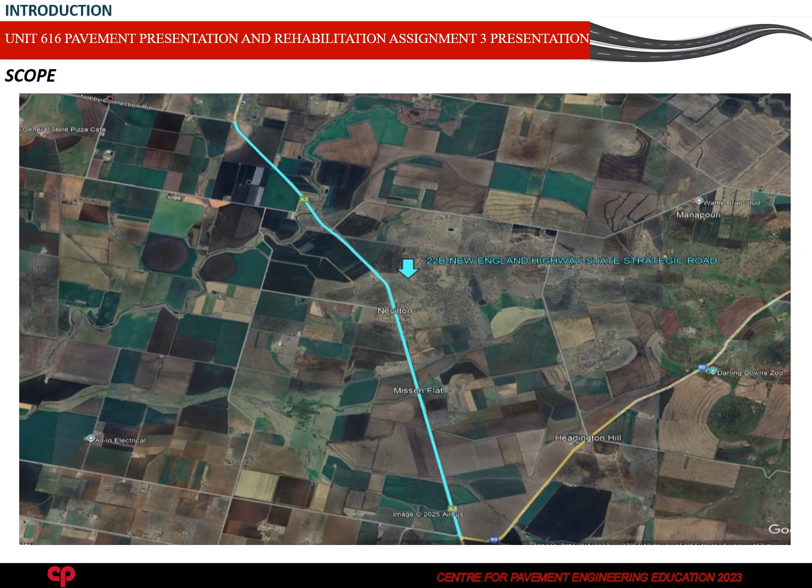The first step in the assessment was a visual inspection of the corridor. This allowed us to identify surface defects such as flushing, rutting, patching, and bleeding. These observations gave an early indication of where the pavement was under stress and helped to validate later data analysis.

In addition to visual inspection, two key datasets were available. The first was the serviceability dataset collected by TMR in 2022, which included International Roughness Index, skid resistance measured by SCRIM, and surface texture expressed as mean profile depth. The second dataset came from deflectograph testing in 2025, which provided deflection bowl measurements to assess structural capacity. Together, these three sources, visual inspection, serviceability data, and deflection data, provide a comprehensive picture of the pavement's performance.

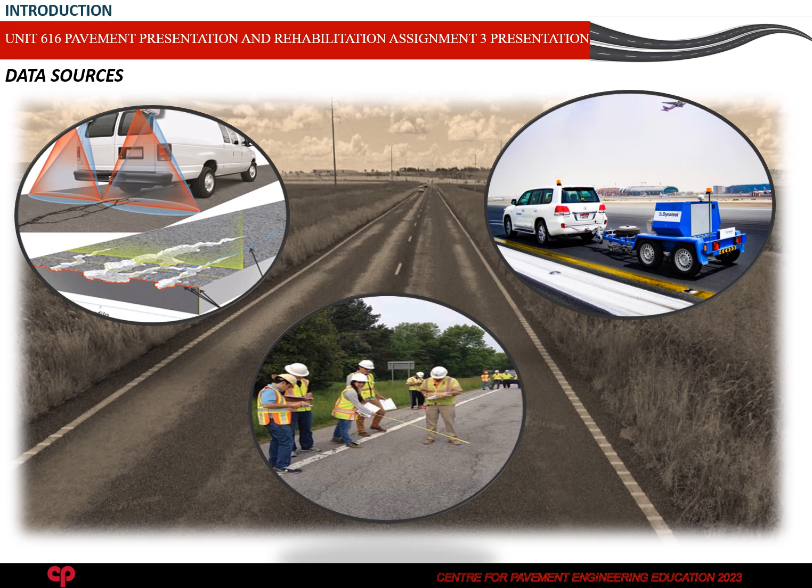The International Roughness Index was plotted against chainage along the corridor. A threshold of 4.2 was applied, which represents an acceptable ride quality. Several sections exceeded this threshold, particularly around areas of patching and rutting. Poor ride quality affects driver comfort, increases vehicle operating costs, and accelerates deterioration in other pavement layers. The results clearly demonstrate that sections of the corridor have already reached an unsatisfactory level of performance from a user perspective and require intervention.

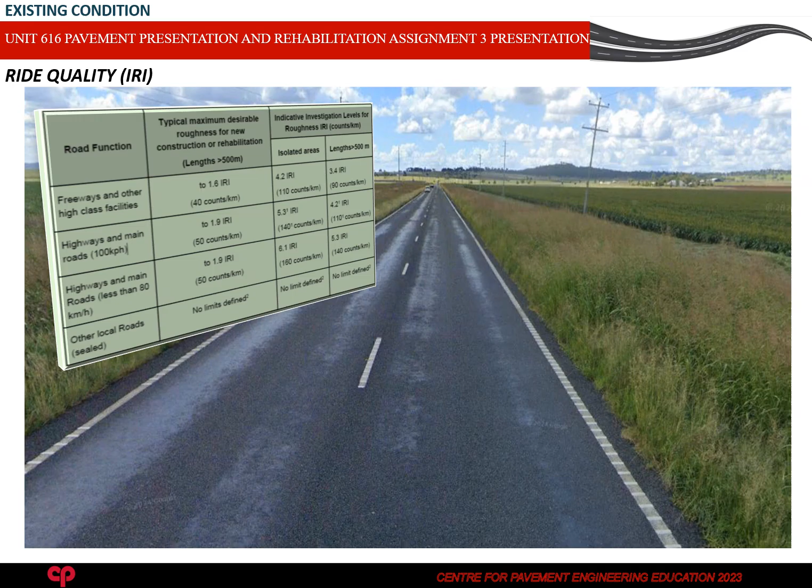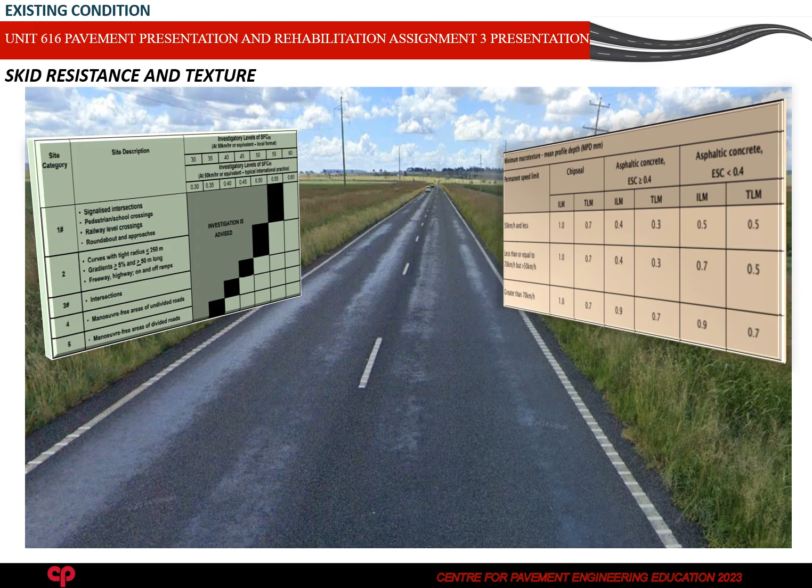Visual inspection confirmed the data results. Common defects observed included flushing and bleeding in sprayed seal areas, rutting in wheel paths, patching where local failures had been repaired, and general surface ravelling. These defects are typical of pavements approaching the end of their serviceable life. They reduce safety, lower ride quality, and allow water ingress that accelerates structural damage. These photos illustrate the visible impacts of the performance indicators already discussed.

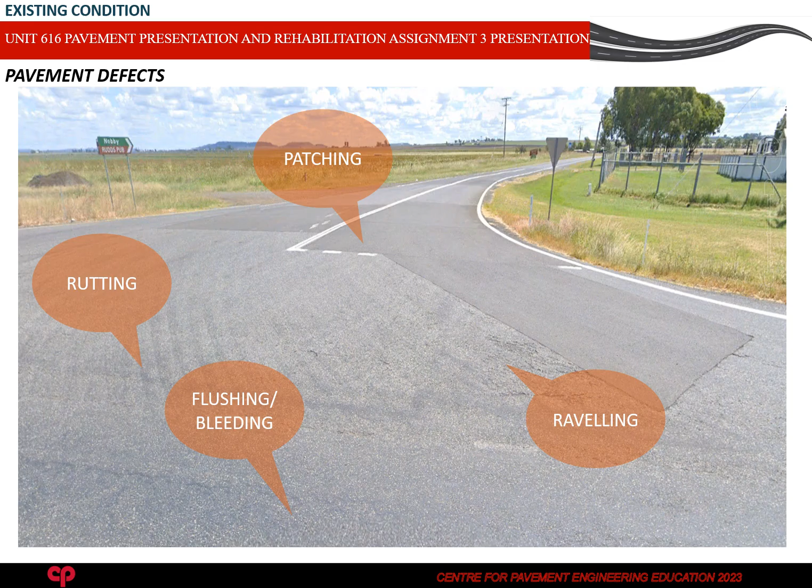In addition to the serviceability survey, structural testing was undertaken using the deflectograph. This provided deflection bowl parameters across the corridor, and in some areas results exceeded tolerable limits. These values highlight where the pavement structure is insufficient. At this stage, our assessment is largely based on this deflectograph data. However, the scope of investigations was limited and more detailed testing will be required before a final design can be adopted. For now, these findings point to the need for structural strengthening.

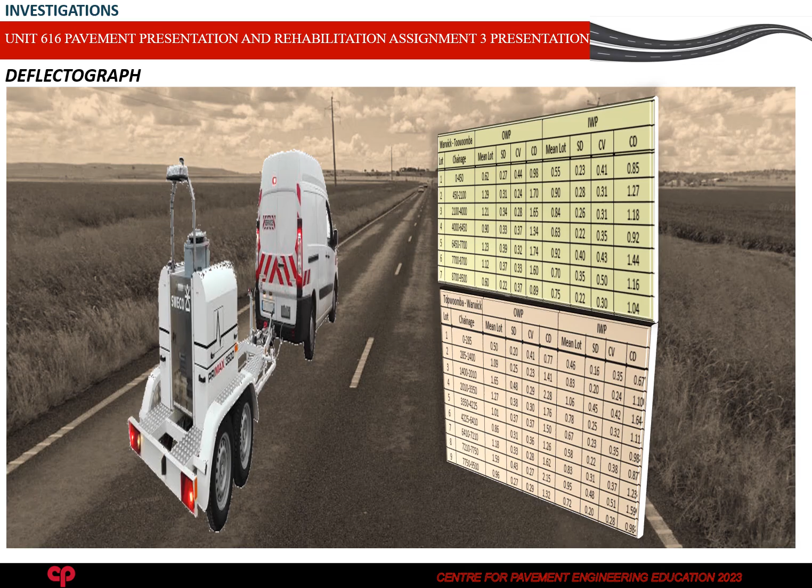The corridor is founded on vertosol soils, which are expansive and moisture sensitive. These soils exhibit low CBR values, often below the 15% required by MRTS-05 for subbase layers. The corridor also passes through areas that function as floodways, meaning drainage is a critical weakness.

Inadequate drainage allows moisture to infiltrate the subgrade, further weakening the pavement and causing differential movements. These geotechnical and hydrological issues must be considered alongside structural design to avoid premature failures.

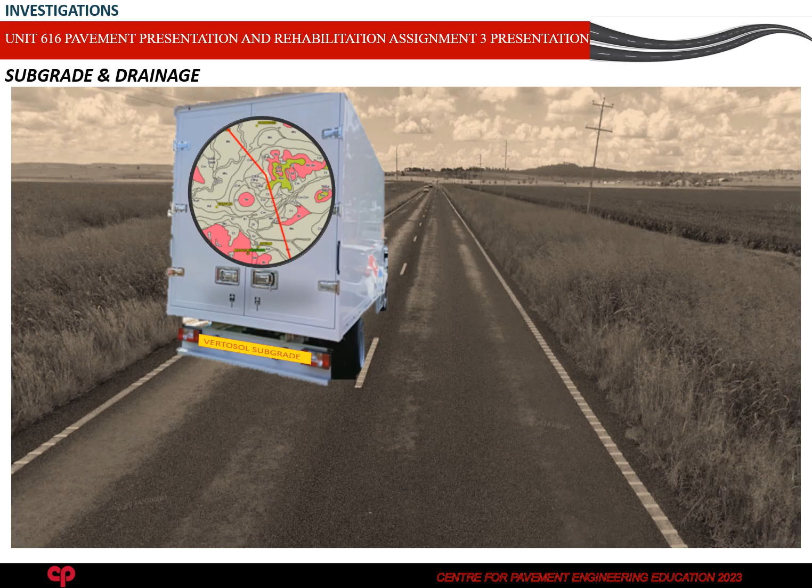The lower subbase material does not comply with MRTS-05 requirements for strength, further compounding the problem. These findings indicate that structural strengthening is necessary in addition to surface treatments.

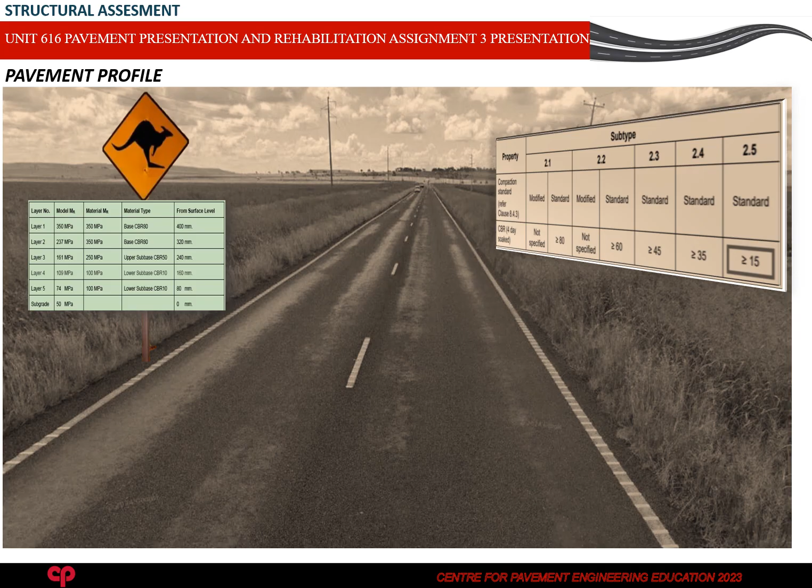Granular overlays were evaluated as one of the key rehabilitation options for this corridor, which required thicknesses ranging from about 110 to 200 millimeters, depending on the chainage and existing pavement condition. The primary advantage of granular overlays is their relatively low upfront cost and the availability of local materials, which makes them attractive for budget-constrained projects and sections with lighter traffic.

However, granular overlays are highly dependent on drainage performance and moisture conditions. Without effective drainage, the risk of premature failure increases significantly. They also require thicker layers to achieve structural strength compared with asphalt, which can create constructability challenges during placement and compaction, particularly under live traffic conditions.

But these charts are limited for granular overlay to 200 millimeter thickness. Some sections should be suggested for reconstruction because they require above 200 millimeters of granular overlay.

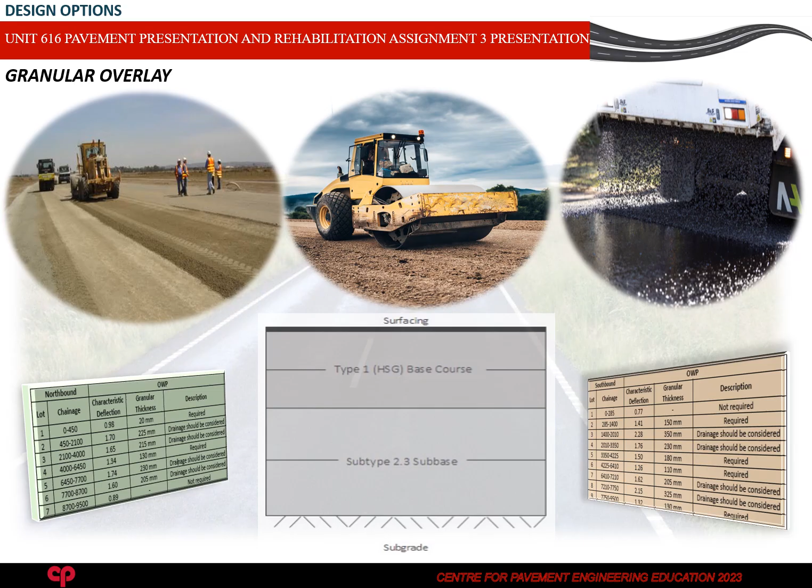Asphalt overlays, typically designed at a thickness of 130 to 150 millimeters using dense graded asphalt, class 320, represent a strong long-term solution for this corridor. For the same reason as the granular overlay, sections requiring above 150 millimeters of asphalt should be considered for full reconstruction as a solution.

They provide both structural and functional benefits. Structurally, they strengthen the pavement to carry heavier traffic, and functionally, they immediately improve ride quality and skid resistance. One key advantage is that asphalt requires less thickness compared with granular overlays, which makes it easier to construct under live traffic conditions and reduces user disruption.

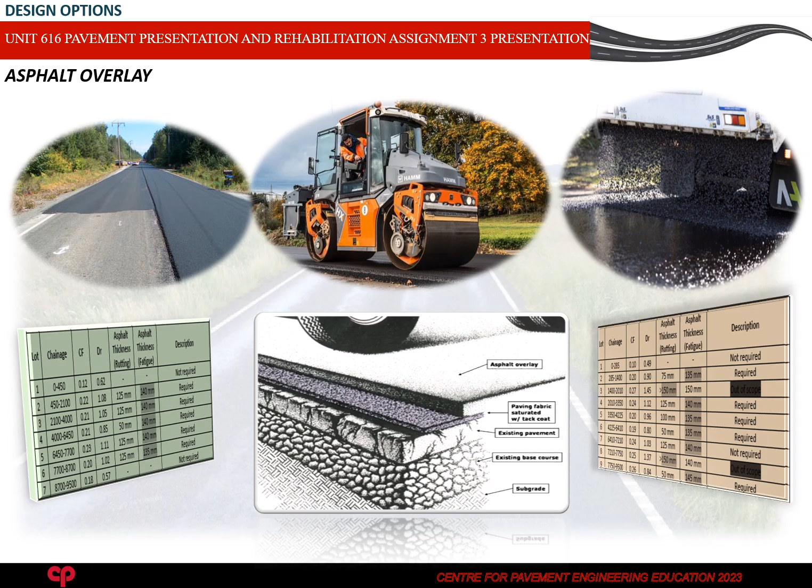In our analysis, overlay thicknesses were determined using empirical design charts, which provide a useful initial guide. However, these solutions are preliminary, and before adopting final overlay designs, additional field and laboratory testing must be undertaken. With DCP testing, test pits, and laboratory characterization, a mechanistic design approach will be possible, giving us more confidence in fatigue and rutting performance predictions and ensuring the overlay design is fully optimized.

When we place granular and asphalt overlays side by side, the differences become quite clear. Granular overlays provide a lower cost entry point with material typically available locally and relatively straightforward construction. They are an attractive option for lighter traffic sections or where budgets are very tight. However, they rely heavily on good drainage and moisture control.

Without this, they are prone to early deterioration, and the thicker layers required to achieve strength can be difficult to construct under live traffic conditions. Over time, their higher maintenance needs raise the overall cost.

Asphalt overlays, on the other hand, come with a higher initial cost, but they deliver significant benefits. Because of their higher stiffness and durability, they provide longer service life, fewer maintenance interventions, and immediate improvements in ride quality and skid resistance. They also achieve structural strength with less thickness, which makes them easier to build under traffic.

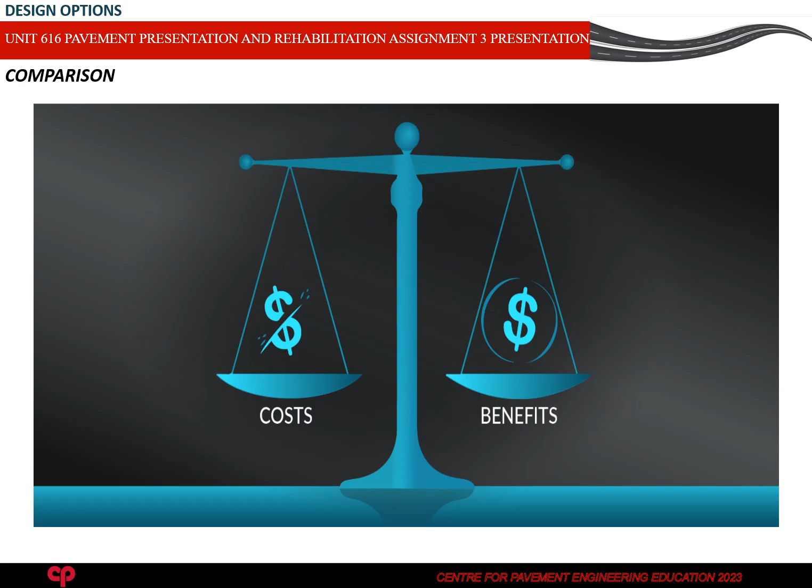In assignment 2, we saw that in several sections, granular solutions alone wouldn't meet the structural demands without drainage upgrades, and asphalt overlays were recommended as the more sustainable choice. Ultimately, the comparison shows that while both treatments have a role, asphalt is the stronger long-term option for critical sections, while granular overlays can still be justified in less demanding parts of the corridor. The key message is that treatment selection should be section-specific, balancing cost, performance, and site conditions.

It's important to emphasize that the design options I have presented are preliminary and cannot be considered final. To confirm the appropriate solutions, further investigations are mandatory. Dynamic penetrometer testing should be undertaken across representative sections to measure in-situ subgrade strength in more detail.

In addition, test pits should be excavated to visually inspect layer thickness, collect samples, and identify any variability in the pavement structure. Laboratory testing of these samples is required to determine material properties, check compliance with MRTS 05 specifications, and assess moisture sensitivity. These combined investigations will provide the robust data needed to finalize overlay thicknesses and validate mechanistic design inputs. In addition, falling weight deflectometer tests are required to carry out back analysis for existing materials if a stabilization process is required.

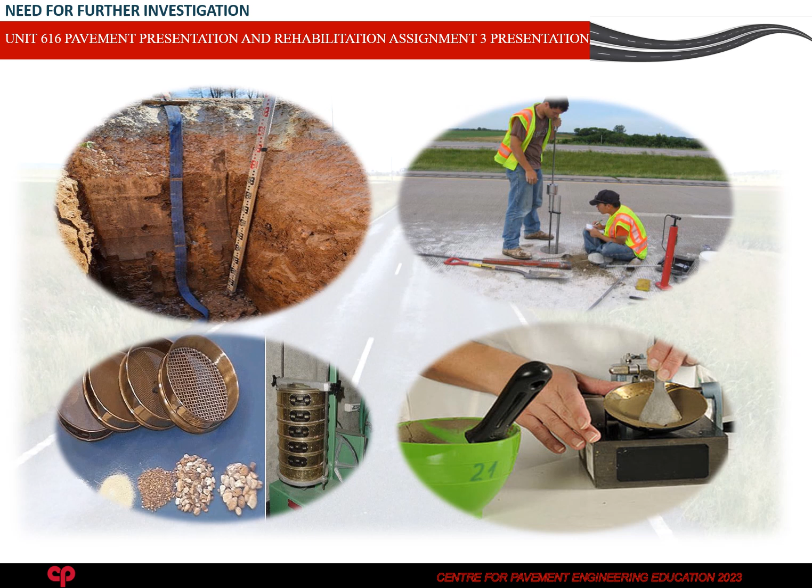In this section, we looked at the options not only in terms of initial construction cost, but also from a whole-of-life perspective. That means we considered the upfront costs together with the long-term maintenance, periodic rehabilitation, and how much value each option would provide over the design period. For example, in assignment 2, we saw that while the granular overlay option may appear cheaper at the start, it's likely to require earlier interventions and more frequent maintenance under heavy traffic conditions.

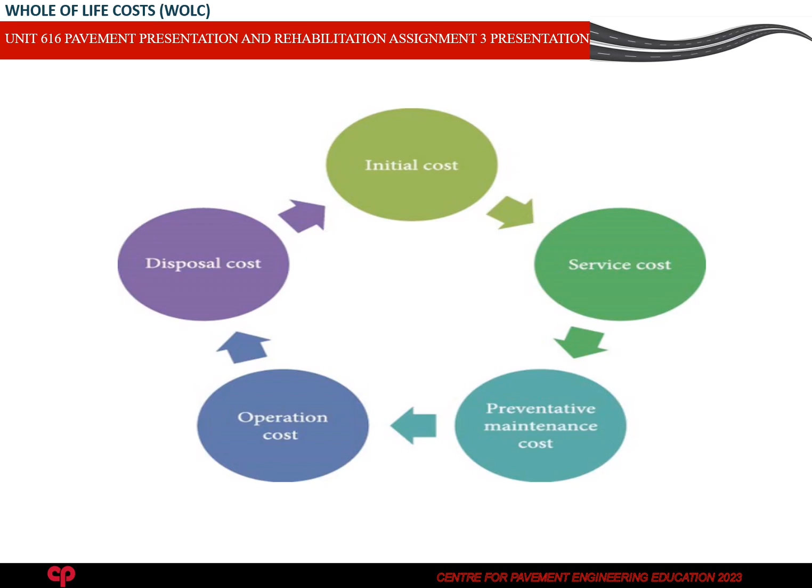The asphalt overlay option, on the other hand, has a higher initial cost, but offers better long-term performance and fewer interventions. When we assess them through a whole-of-life cost lens, the asphalt solution demonstrates better economic efficiency over time. This method helps ensure that our recommendations are not only cost-effective at construction, but also sustainable, reliable, and financially responsible across the pavement's full design life.

One of the primary challenges we face on this project is the lack of adequate drainage solutions. Without proper subsurface and surface drainage, there is a high risk of moisture ingress, which accelerates pavement deterioration and reduces structural capacity. Another critical issue is the presence of expansive soils, which are highly reactive to moisture changes and can cause heaving, cracking, and loss of serviceability. Addressing this requires careful selection of overlay thickness, material stabilization, or even subgrade treatment.

Finally, we need to consider construction-related risks, such as traffic management during works, weather sensitivity, and material availability. These factors not only affect the practicality of implementing the selected alternative, but also the long-term performance of the pavement. Together, these challenges highlight the need for robust design decisions that integrate geotechnical, drainage, and constructability considerations.

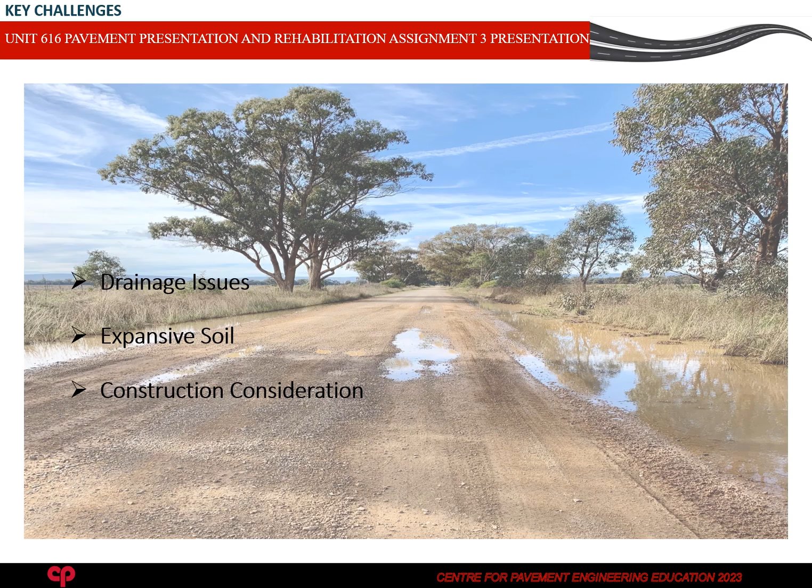In the immediate term, thin asphalt resurfacing is recommended for sections with critical safety risk due to low skid resistance or poor texture. These quick interventions will restore safety and serviceability for road users. Immediate works should also include sealing cracks and preventing further water ingress. These short-term measures are essential to maintain functionality while more substantial works are planned.

In the medium term, targeted overlays are required to restore structural capacity. Granular overlays should be applied in lighter trafficked areas where budgets are constrained, while asphalt overlays should be prioritized for high traffic or structurally weak sections. This targeted approach ensures that resources are used efficiently, addressing the most critical needs while keeping overall project costs manageable.

In the long term, more fundamental improvements are necessary. These include upgrading drainage systems to reduce floodway risk, stabilizing subgrade soils to address expansive behavior, and maintaining a consistent monitoring program using IRI, SCRIM, and deflection testing. These measures will build resilience into the corridor, ensuring it can provide reliable service well beyond the next 20 years. The long-term strategy aligns with sustainable asset management principles.